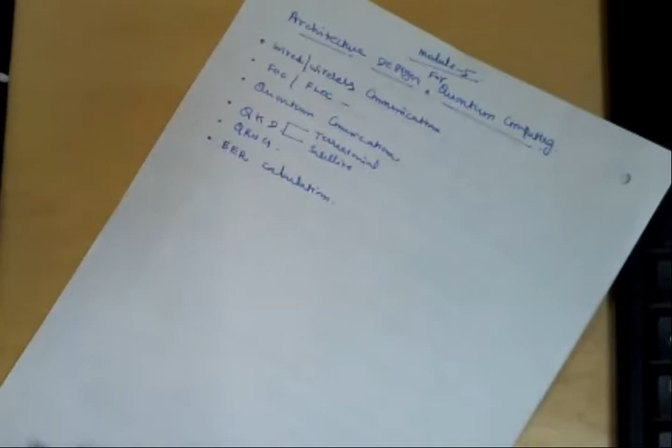This will be continued in depth in subsequent courses for quantum people. FPGA people won't have a course based on this, but all the control nowadays—polarization control, beam splitting, power amplification, basis selection, horizontal or vertical polarization, diagonal or anti-diagonal polarization selection, detection, decision making—everything is in FPGA only. For quantum computing, only the quantum is the carrier.

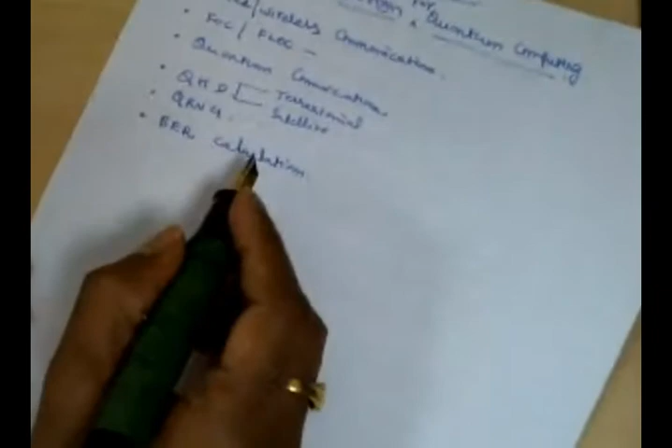These are the topics I would like to cover to give you some idea about quantum communication. Listening to me, you will get some idea how technology is revolving from simple messenger-based or words-based communication to nowadays quantum communication.

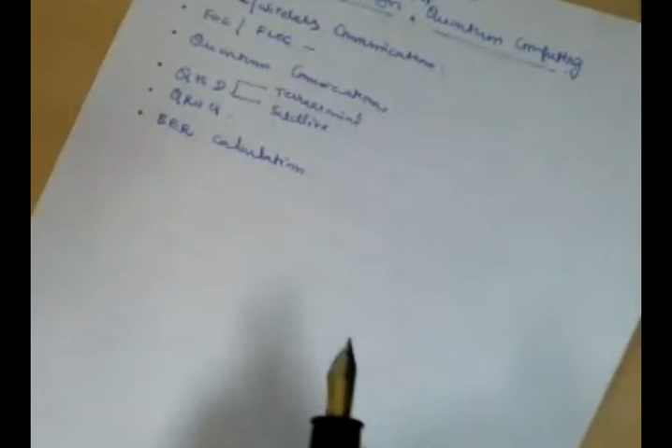There is one paper, if you are interested, you can read—that is my paper only. One second, I will tell you the topic. You can write it down and read it also.

The topic of that paper is: Historical Perspective of Free Space Optical Communications, colon, From the Early Dates to Today's Developments.

I'm sending it in our group also, if you are interested you can download and read it. This is very good, starting from bird-based communication. A few centuries back, people used birds to convey messages. They tied the message, and the bird was trained to go to that particular destination, then it came back automatically, because birds have that character—wherever they go, they come back to the same sending point. Then the messenger-based communication evolved.

So we will not go to that much of the origin of communication—we start from wired and wireless communication. If you read this paper, you will enjoy it: at different centuries, how technology was demonstrated, and how communication revolved from one technology into another. What was the need for that? Who was the inventor? Who commercialized it? Who proved the technology—proof of concept, POC? Then who made it a commercial system? All those things are given in this paper.

From bird-based communication to today, we have quantum satellites—quantum satellite, quantum deep space communication now. There is a plenty of changes, a quantum of changes in technology. Unbelievable, unimaginable changes happened in the last few centuries, particularly in electronics and communication, mechanical fields, information technology, security, defense, remote sensing, underwater surveillance, underwater communication. So I can say that except the electrical field, almost every field got changed dramatically.

So that research is still going on. We also started some work long back, but we didn't succeed because of so many limitations. We did not have that much magnetic power, that much powerful magnets, and the particular shape of magnet we needed, we didn't get in our country. So we tried to import from Japan and Germany, but they ask for a minimum order of 1,000 units, otherwise they are not ready to supply here. So a lot of things are there. If you have time, you can read about all these things. This is a very challenging field. Not much research has progressed, the reason being the availability of so many supporting systems and subsystems.

So you can see some YouTube videos where they made some perpetual rotation. There are things like a bird that moves like this, this action happens without any battery, without any power. So these are all the successes so far. We are at a very below the toy level in this electrical field, right? Okay, we will continue our things now.

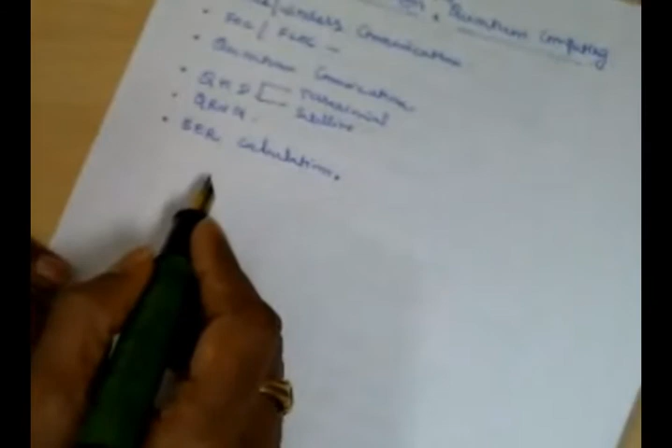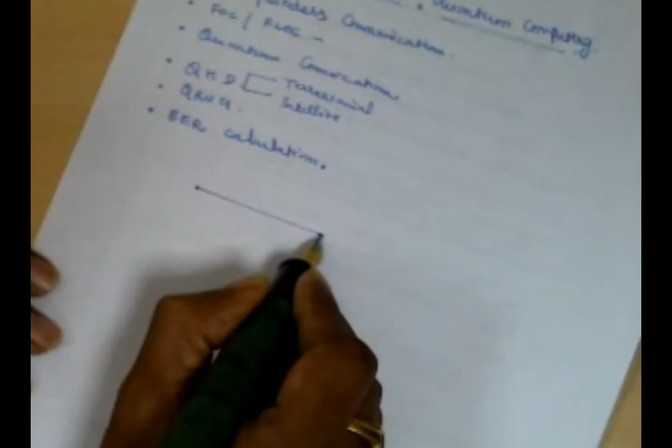Okay, now look here. In wired communication, before or after sending messages, we lay the cable from one point to another. You take this may be Pune, this may be Mumbai. That means we lay the cable from here to here. This is the physical cable, what we call telephone lines.

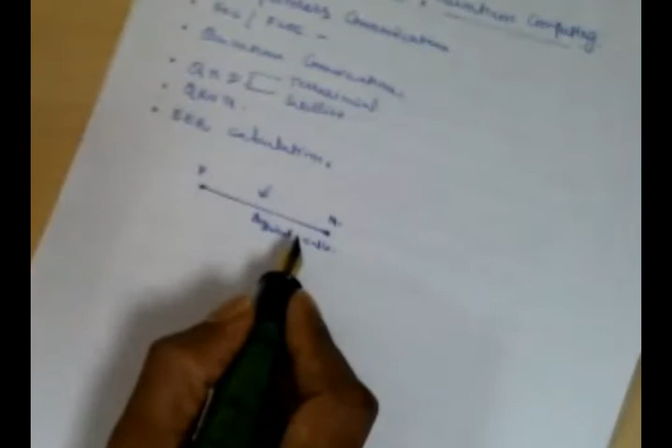You might not have seen such telephone lines at your age. You can ask your father, grandfather, or mother, they might have seen such cables. Any of you seen the telephone cable? Not the BSNL line in the street? I don't mean the cable coming to your instrument, your telephone, from the underground fiber or underground cable into your telephone. I don't mean this one. In the street, there was a post, they laid the post on the sides of the street.

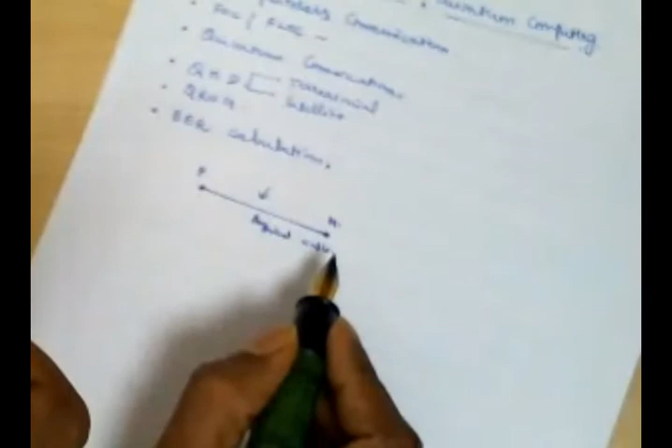From there, they ran the cable. That you have seen? 25, 30 cables like that. No sir, not that. I don't mean that. If you have a landline phone, one cable will come. I've seen that one, sir. No, you are very young then, I don't mean that cable. So this is the street, right?

So there was a telephone post here on the side. They ran so many cables - 50, 60, 70 cables. That is called telephone cables, not this one. This is your local connectivity, no?

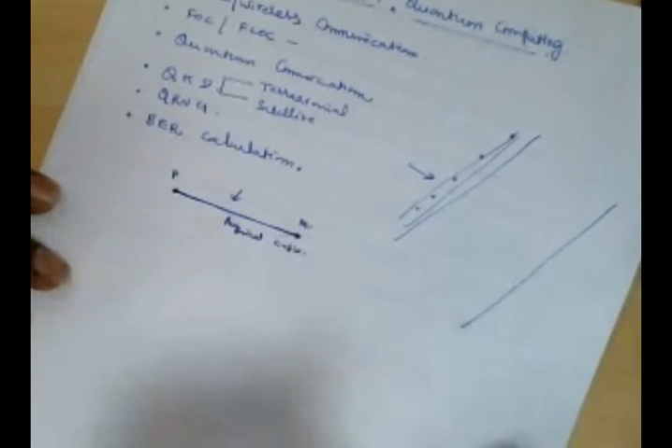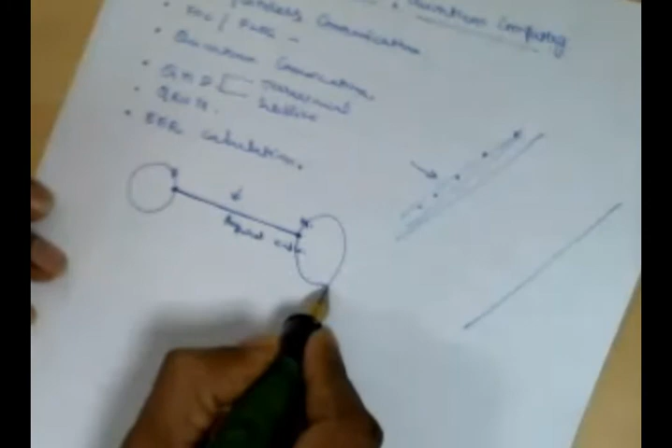Okay, Mamata? Yes sir. Ask your parents, your mother and father. They might have seen it. Now it is completely removed, no telephone cables nowadays, right? So no problem, they laid the cable from here to here outside on the post, right? So now suppose you want to communicate from here to here, there was one exchange. I know these things, I used to do these things, but don't feel that I'm that old, right?

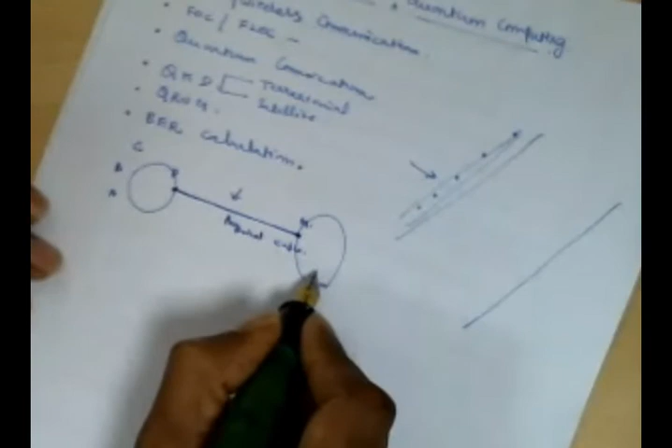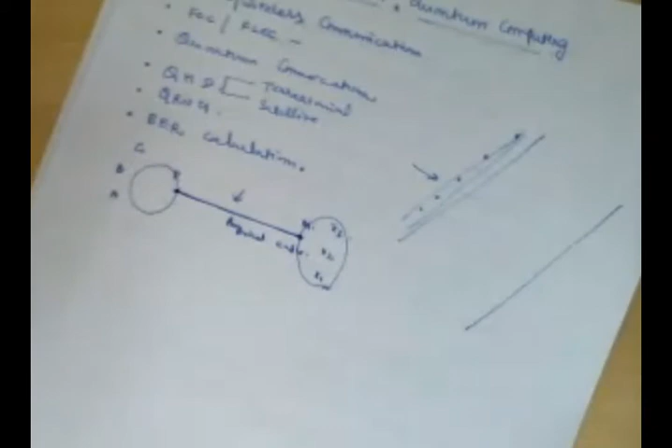So suppose A is here, B is here, C is here, right? Or maybe take X1 is here, X2 is here, X3 is here, and this was the situation. You people are very comfortable nowadays, in a hygienic, very comfortable luxury life. But this was not the life, right? But most invention happens in those days only. Nowadays we are finding applications, not inventions. Inventions are very, very low in this century and the last century also, mostly, right?

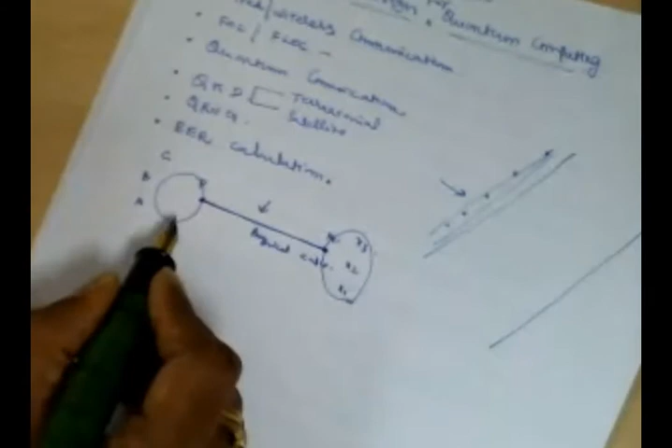Okay, so A, B, C. Suppose A wants to talk to X1, then A should give information to this operator. That is called a trunk call or book call, right? No such word nowadays. If you want to make a call anywhere, you just dial the number and get the link nowadays. But that was not the case before 20 years.

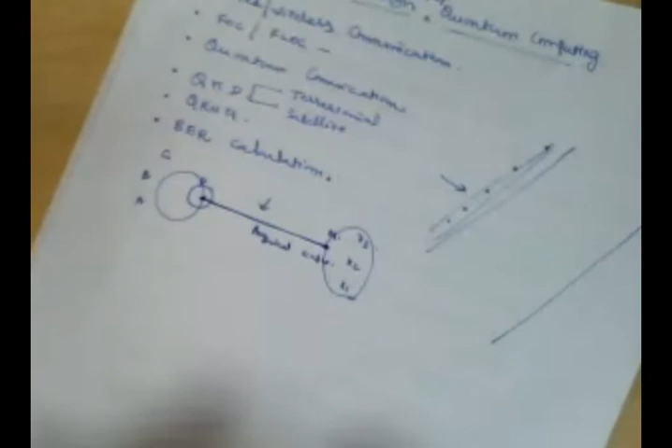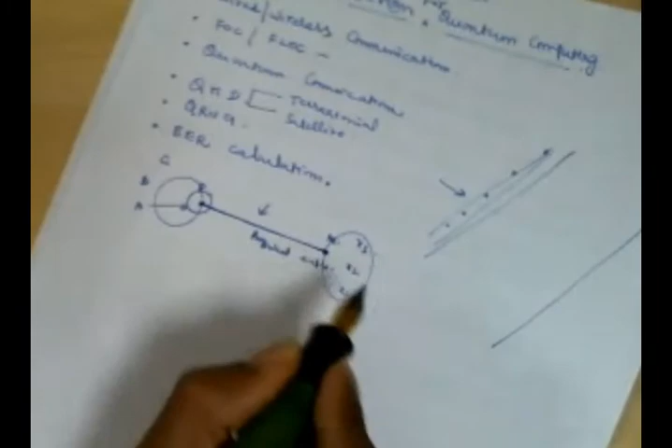So A will inform the operator, 'Baba, I want to talk to X1.' Then this fellow will say, 'Wait a little, B is already talking to X1 or X2.' Then you have to wait. When this line becomes free, that means the busy signal is over, then this fellow will remove the jack and connect it to your phone, and tell you, now you talk. Then he will connect it to X1 and connect it to A, and you can talk. Sorry, this was the case of what we call trunk calls or book calls, right?

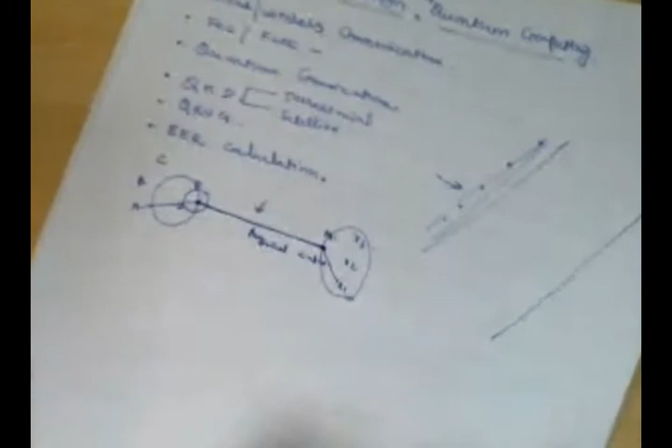Okay, first thing. Second thing, the users at that time, not telephone - if you had a telephone connection, you were the richest person in those days. Like once upon a time, if you had a cycle, you were treated as a zamindar. That means you are the richest person because you have a cycle. 'Arey, that fellow purchased a cycle, arey baap re!' So at that time he used to give a license for the cycle. Otherwise the police would not allow you to use it on the road. You could get the license for the cycle.

So at that time, if you had a telephone connection, people rushed to that house to see the telephone. Like people rushed to one house to see the TV, right? So this is that telephone connection. Then people came to know, and the number of users increased here and there.

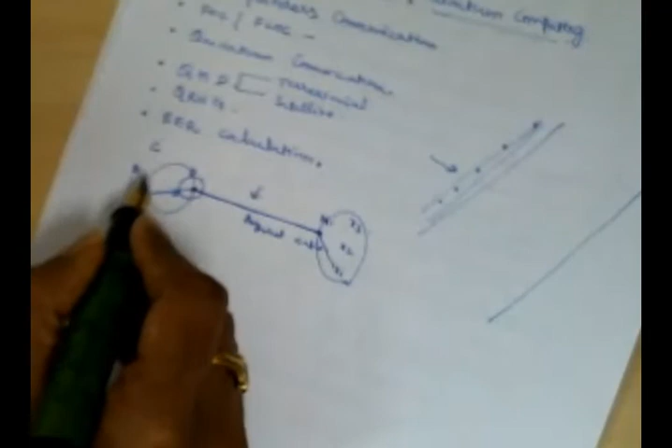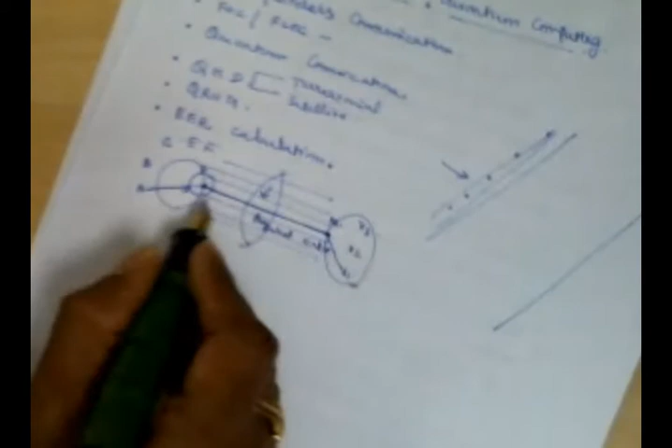So A, B, C, D, E, F, G, H, A - then they were unable to manage with one cable. Therefore they ran so many cables to increase the bandwidth, I mean capacity - to increase the channel capacity, the handling capacity, to increase the number of cables. First I have seen 2 cables, right? Then because of earth and one main cable, two should run, because this is physical connectivity, earth also should go there, right? Two, then 10, then 20, then 50. So I have seen up to 50, 75 cables also.

While going to school, we used to take one stone and throw it at that line. Then it would make a sound, a sound would come. Because so many cables are there, if you randomly throw a stone, it will hit one line, and there will be a sound.

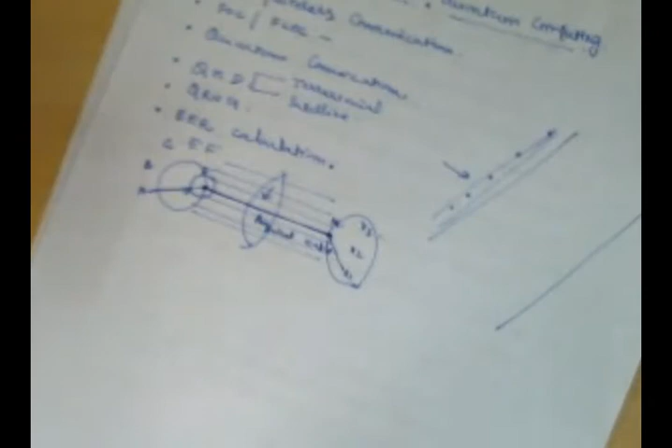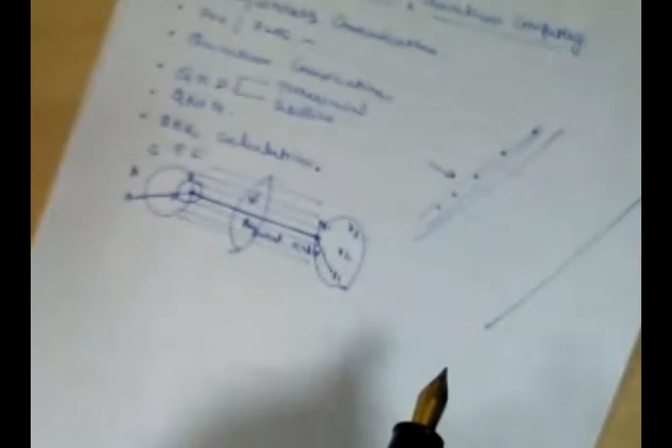That was a stiff line that we used to enjoy. At that bachpan time, we used to keep our ears at the bottom of the post to hear the voice, because people were saying voice is going there. So we did all those things, but we heard nothing. But at that age, in first standard, second standard, how would we know? We just wanted to hear what people were talking.

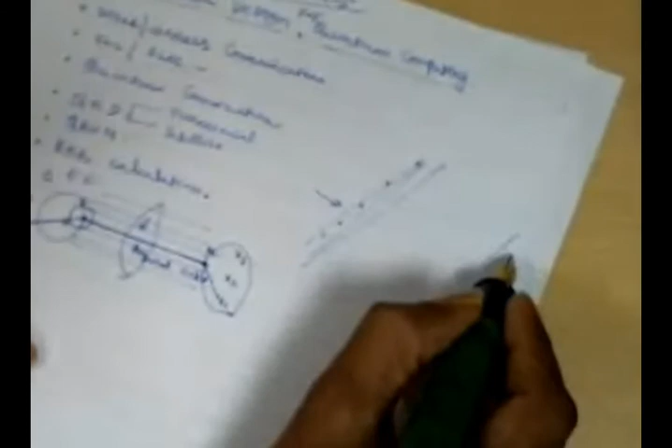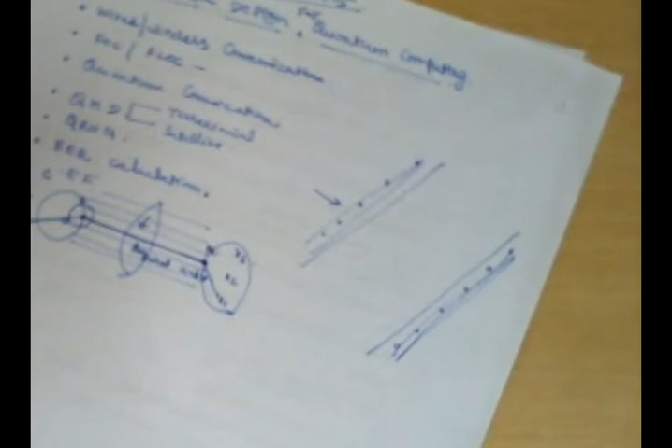Because at that time we didn't have the telephone, right? So many lines were there, and they used to lay the post on this side also, both sides of the road. Another 50 lines there too. But there were so many problems - people throwing stones and putting cloth there, keeping their flags there, and shorting them unknowingly by putting some metal rope so that it gets shorted. So when A is talking to X1, B also hears it, C also hears it.

So anyway, this is one limitation. Another limitation is maintaining the cable, running the cable. Any wind or rain, the post will fall down. So because of all these issues, and also the bandwidth, people moved into wireless communication.

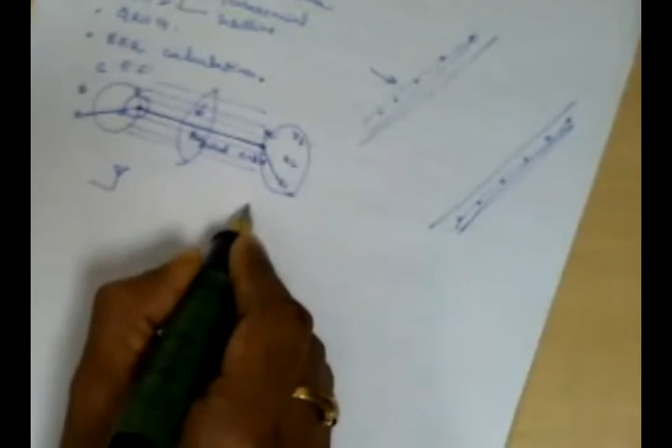Wireless communication means the physical connectivity is completely removed. People moved into wireless communication. Then so many lines were applied, and after that they implemented time division multiplexing also. Time division multiplexing means this cable will be used to connect so many links at high speed switching - what we called the commutator and decommutator. But nowadays there are no such switches.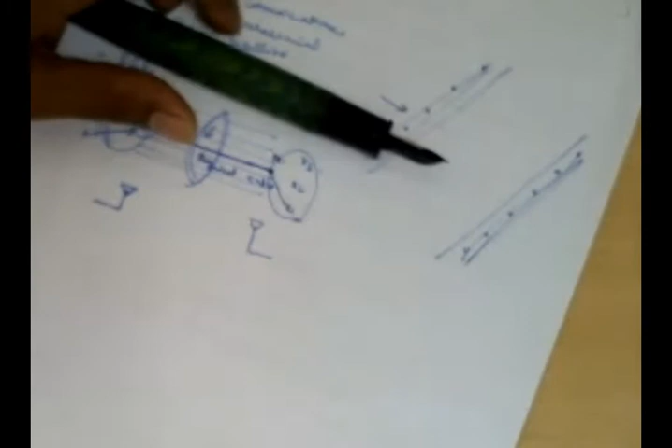Physical connectivity - there was a motor, a high speed motor that will rotate. So there are 10 channels, and it rotates at high speed, 1000 RPM per second. So all 10 will be connected to any 10 they want to connect, because it's working at high speed. So your voice will not be broken - there's no loss of information because of high speed connectivity. But that also didn't meet the requirements because of so many users.

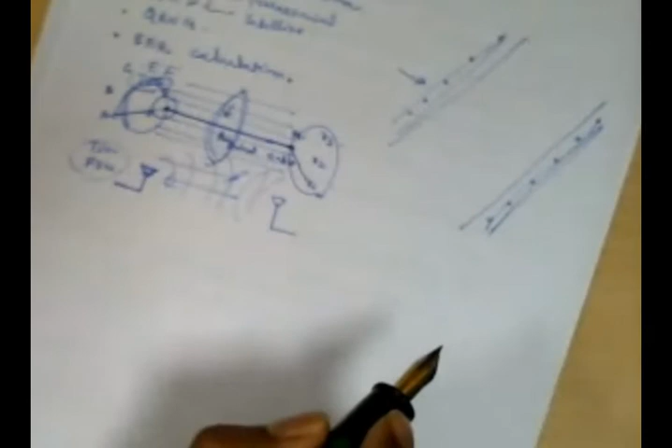Therefore, they moved into wireless communication, and applied frequency division multiplexing and time division multiplexing. This was very comfortable because it was wirelessly communicated - full duplex, half duplex, simplex, all these happened in that period. Now this is still one function.

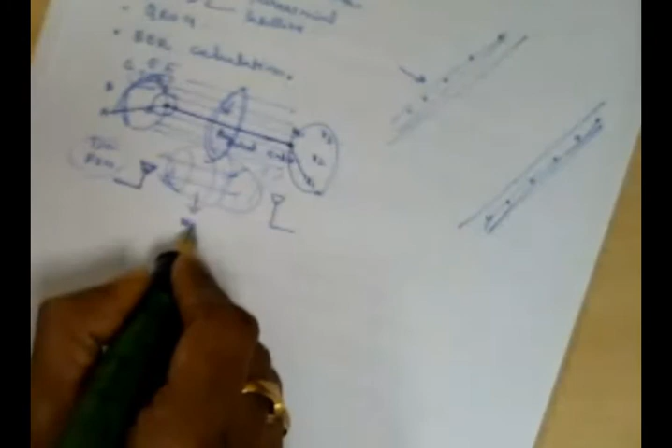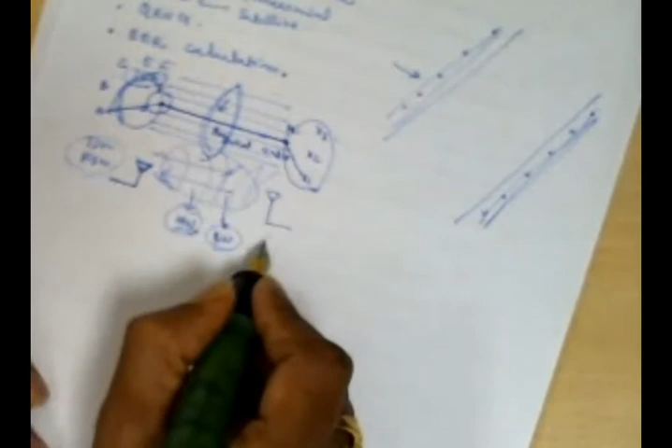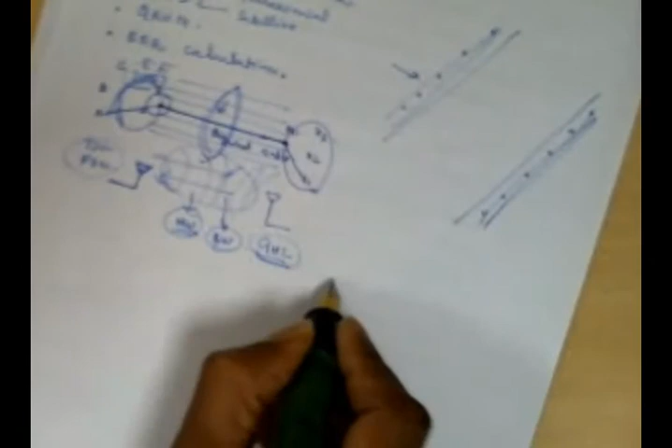Light carrier is nowadays available at terahertz, at high frequency. Terahertz wavelength is like 1550 nanometers - very, very small. We will come to this part later. So the frequency limitation is there, therefore the bandwidth limitation is there.

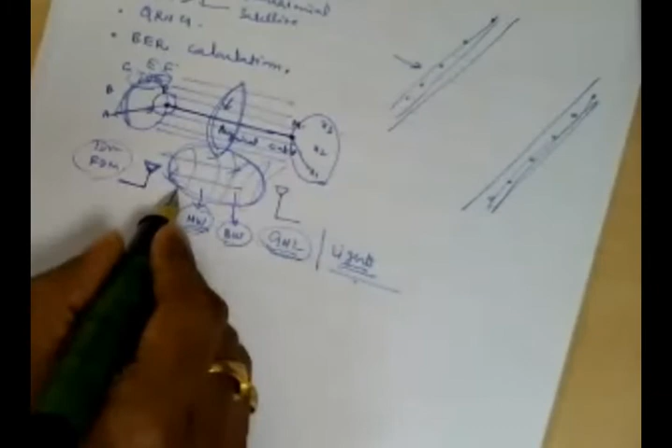Because nowadays people want to have everything in a small gadget called mobile phone, or PDA - personal digital assistant - which has become very popular. It will decide everything: if you program it, it gives your coffee time, tomorrow's lecture, your meeting, doctor appointment, and your boyfriend or girlfriend or bestie appointment.

So bestie appointment, or your children's school parents meeting, or your brother's doctor appointment - this mobile phone will take care of everything. You want all apps installed: railway ticket booking, air ticket booking, money transfer, purchase, food order, clothes order, games - everything you want to do within this one device. Therefore this instrument should have a high data rate link - a high speed, ultra speed link is required now.

So the two things are there. One is, instruments want ultra speed data link. At the same time, the number of instruments has also increased nowadays, number of users also increased in the order of millions into millions, and every instrument wants ultra speed data connectivity now. Therefore, this fellow cannot give you that much data rate, that much bandwidth, because it has frequency limitations. So, due to frequency limitations, we moved into fiber optical communication.

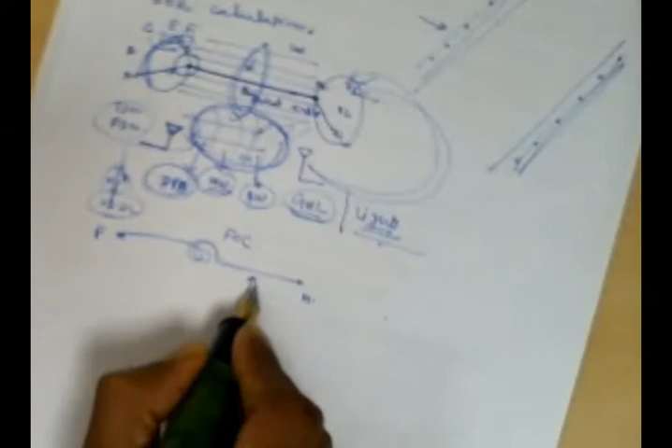So again, the issues are there running the cable, because fiber cable fabrication is costlier. There are two kinds of cable: one is the commercial cable, another one is the dark cable, dark fiber optical cable, or highly secret fiber optical cable. This is highly costlier. So quantum requires this kind of cable only to pass your key. In this dark cable, or highly costlier cable, you can maintain the polarization, whereas you cannot maintain the polarization in the commercial cable, which is used for classical communication.

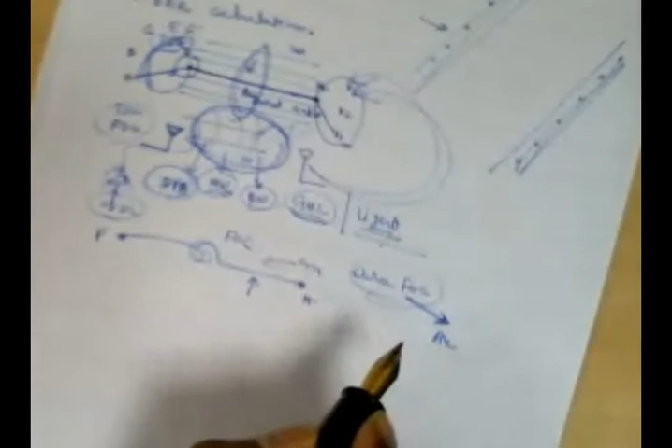So I will talk about the engineering point of view, right? Professor Raghavan sir is talking about the physics point of view. So you need to understand both. Whenever I tell you about the dark cable and all, he will give you the physics point of view, how it is made, fabricated, all those things.

So ultimate idea is we need to lay the physical connectivity now. Physical connectivity is there now. So here the fiber is there, because here the carrier is microwave or millimeter wave, but here the carrier is light. Now you need to understand, we are not going for fiber optical communication because of fiber. We are going for fiber optical communication because of light. Light is the hero here, because light is high frequency, terahertz, a high frequency signal. Therefore, you can pump more amount of data through the channel now.

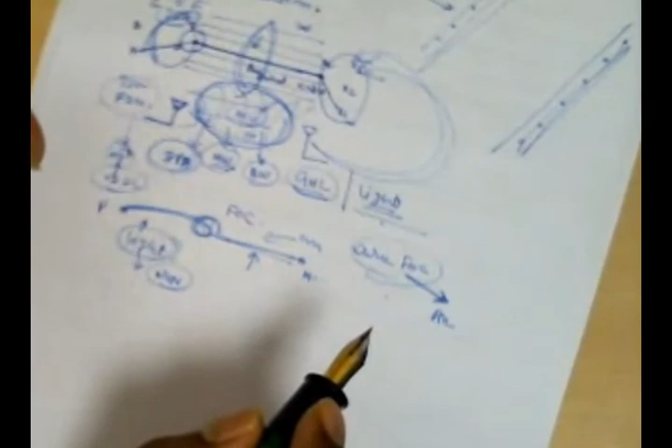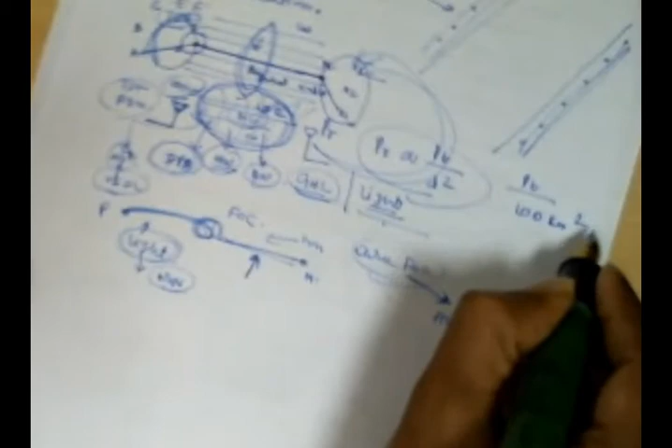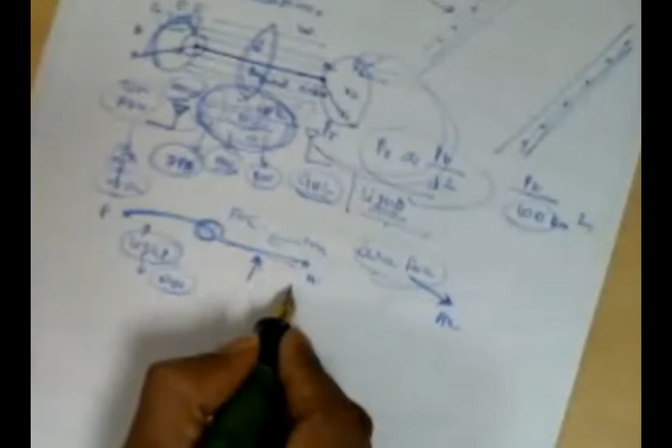But the research was, the fiber was made first of all to pass the light from one end to another end, so that there is less attenuation, because this is a very ideal medium. Whereas if you pump 100 watts here, and if you want to measure the power received at this point, PR is directly proportional to PT divided by d squared. That means if this is 10 kilometers, then your transmitted power will be divided by 100 kilometers squared. So ten times the range, 100 times the transmitter power will be reduced because of the free space loss. Whereas in the fiber, there is no such amount of loss, only 0.2 dB per kilometer.

This is very negligible loss in the glass medium. Very comfortable medium, very ideal medium. So you can pump your light here, right?

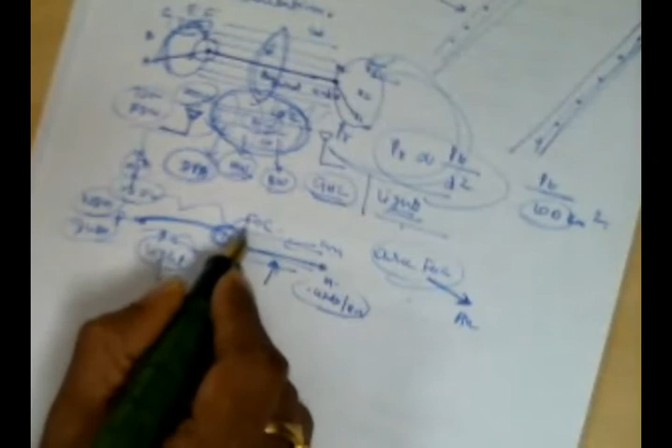Then people introduced WDM, wavelength division multiplexing, dense wavelength division multiplexing, to increase the channel capacity over a single fiber. Then they laid 2 more fibers, 3 more fibers to increase the channel capacity. Already the light is a high capacity channel. When we increase the number of channels, you can further multiply the channel capacity. Therefore, you can meet the requirements.

Nowadays, almost all the points are connected through fiber optical cable. From exchange into your local distribution station or data center, we have fiber optical connections. You might have seen it on the road also, where they ran the fiber optical cable or buried it in the ground. All BSNL, Reliance, every service provider is keeping the fiber optical cable for high speed communication, high data rate communication and high channel capacity communication.

Now the question is, why do we need fiber? Why do we need fiber? What happens if the fiber is not there? Because the fiber is not helping us for high data rate or high channel capacity.

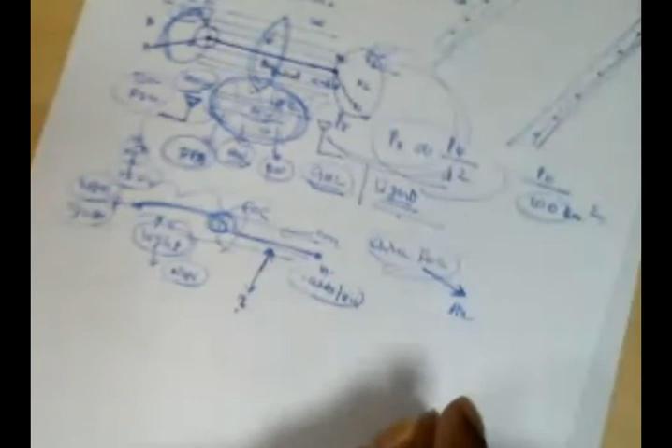Only light is supporting us. Light is the agent here. Light is the hero here. Because of light only we are able to modulate the data at high data rate. You can accommodate more and more channels. So channel bandwidth is high, channel capacity is high. Everything is increased because of light, not because of the fiber. So the question is, this is called fiber optical communication.

Question is, I will take the laser source here and directly pump into this point. Assume I am maintaining line of sight between two points, say 10 kilometers apart. So I'm pumping the light from here to here. This is the modulated light.

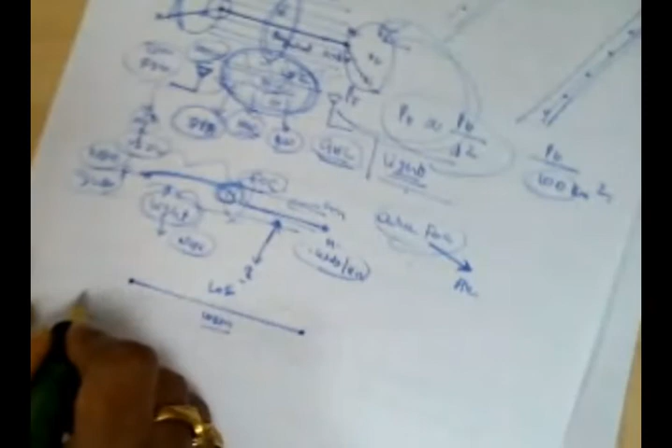I'm using the laser source here, transmitting in the air, in free space. So the light will be collected here, then you demodulate it. You do all your receiver chain operation, then transmitter chain operation here, receiver chain operation here. What will happen?

I replaced the fiber now. So this is what we call free space optical communication, FSO, fiberless optical communication, or wireless optical communication. So now the technology is going back again into wireless optical communication. See that communication revolution: birds, messenger, person, wire, single wire, multiple wires, wireless using antenna, TDM, FDM, then wired fiber optical cable, then fiberless optical communication now.

NASA claims that they have ground to satellite communication through laser beam, satellite to satellite through laser beam, then satellite to ground laser beam now.

Here the advantage is no need of laying any fiber cable. You don't need to spend money for the fiber, because in fiber optical communication, most of the amount the service providers spend is for purchasing the fiber, laying the fiber, maintaining the fiber, amplifying the optical signal in between. So all those things are removed now.

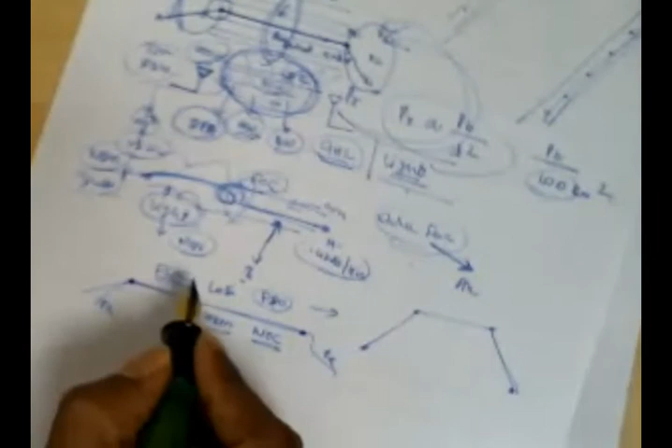Just you keep the laser source and focus it. You might have seen that keychain laser, some of you might have used it also. A small laser, something like that. If you switch it on, the beam will go there. So the power is only 0.6 milliwatt, but that can go for 2 kilometers. So that is what we call free space optical communication.

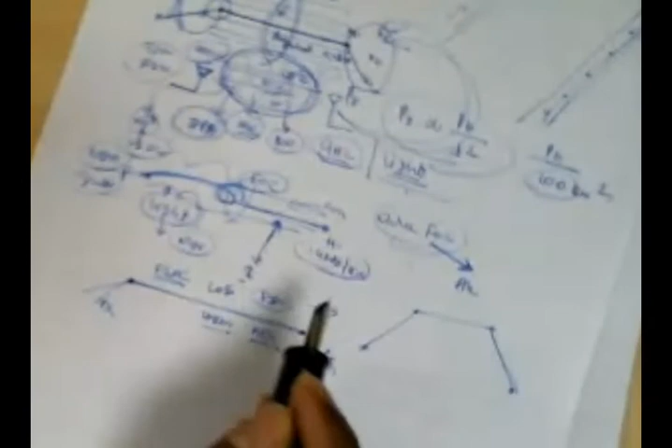So people are working in this field now. They want to remove the fiber optical cable using this kind of communication, free space optical communication, wireless optical communication. From here, the technology had taken a big jump, right?

Because behind this, Einstein was already talking about the quantum, right? People did not realize the quantum till now. They were telling that it is imaginary only, that it cannot be realistically implemented, that it is difficult, all those things. Whatever Einstein told in those days, there is one book, another book, 'Mr. Einstein, You Are Wrong.' You can read that book also if you like, you can download it, or there may be one for 200 rupees only. I have that book, I can give it to anybody who needs it.

Mr. Einstein, you are wrong - that book mostly talks about his arguments and statements about quantum theory. People opposed him in those days, right? Many people opposed, even top level scientists also opposed.

Mr. Einstein, you are wrong, they said - there is no quantum at all. Quantum principle is not realistic, that is imaginary. But now people are realistic. They are realizing nowadays, implementing it at a smaller level.

So we also started a big program here, spending around 250 crores at the country level, to go for QRNG, quantum key distribution, satellite quantum communication, and free space quantum key distributions. I have taken some papers - if you're interested, you can read them, I will put it in the group.

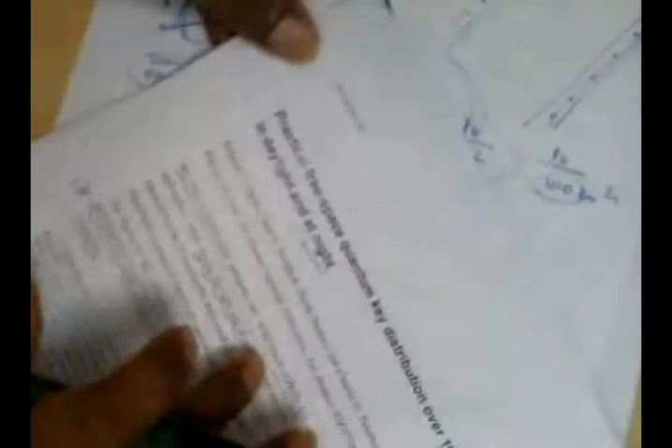One USA group claims practical free space quantum key distribution over 10 kilometers in daylight and at night. This group is also involved in quantum satellite communication now. So these people successfully distributed the quantum signal for 10 kilometers.

Then there's an FPGA based 4 megabits per second secret key distribution engine for the quantum key distribution system. Wherever you talk about QKD or QRNG, there is FPGA involved, because the FPGA is what selects your polarization. How does QKD work?

One more paper - this is very interesting - practical free space quantum key distribution over 1 kilometer. FPGA is there inside, you can see that one also.

So you cannot separate the FPGA engineer from the quantum engineer, because both are significantly linked nowadays. So you need to write all the major algorithms from here, where the technology has taken off. I have only 20 minutes, so I'll go a bit faster now.

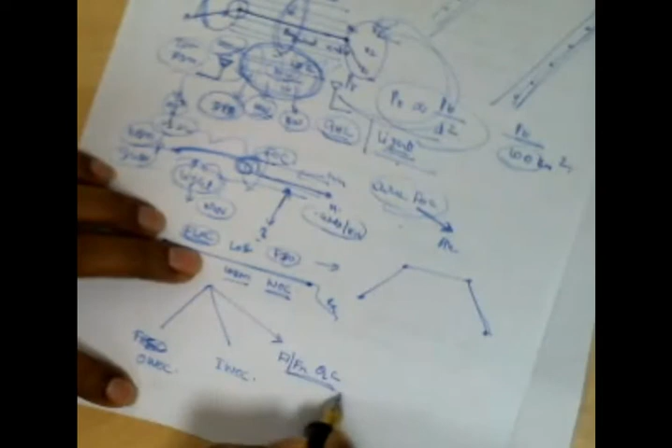Outdoor optical wireless communication means your beam travels through the atmosphere so you can communicate. Indoor optical communication means that almost in every room, every conference hall, every institute, every company, you use light in daytime. So now I am also using the light - research says why shouldn't we use this light for providing everything to the user.

That's what we call visible light communication. That means you just need to switch on one light, then the light falls on all the places in your room. That light will give you internet connectivity, mobile phone connectivity, your entertainment channels, TV channels - through light you can access any kind of application. That's what we call Internet of Everything, IoE - Internet of Things is gone now, it's Internet of Everything.

That means with visible light, you just need to keep your gadget below the light. There are 3 lights, that light definitely falls on your instrument, no limitations, so you can access everything now. You don't need to run any cable from one point to another - that's what we call indoor wireless optical communication. So a light is there, therefore you can meet the high bandwidth requirement.

Then you go outside for quantum communication. But in these 2 technologies, you need to pump millions of photons - suppose I have a laser source here, this is the laser source, and I have a 3 millimeter beam. So I'm pumping now.

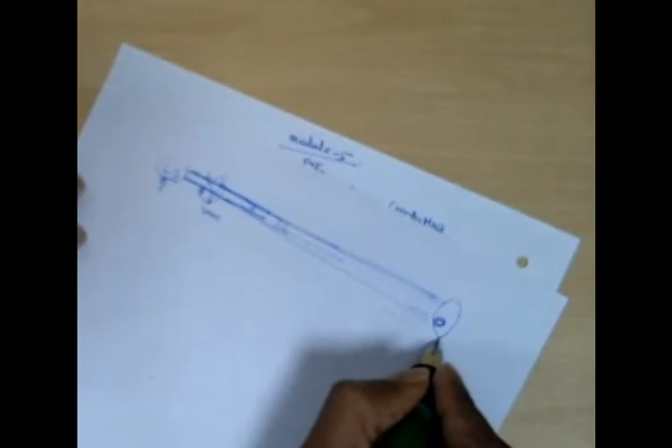So whenever I communicate here, if it is traveling in the free space, there will be a sort of divergence that you can control by the proper optics. You keep the detector here, a receiving telescope, collecting some number of photons, or all the photons, and then converting into electrical signal. That is happening in the free space optical communication.

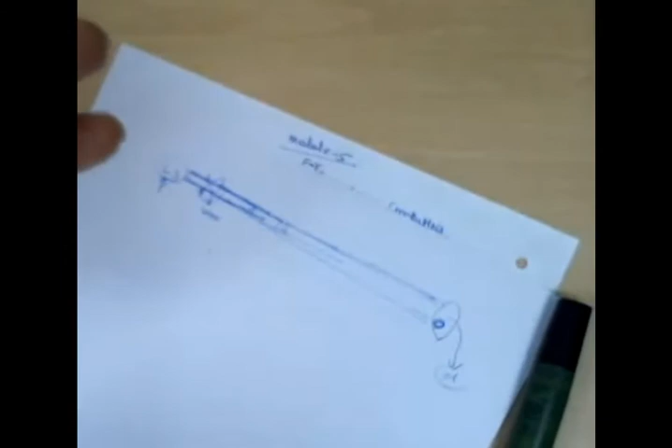Or even in the fiber optical communication or indoor wireless optical communication, we talk about the light only. Light means millions of photons together. So in that case, suppose I'm sending million into million photons here, and I'm capturing some number of photons.

There may be attenuation in between, so some photons will die due to scattering. If the size of the medium particles is comparable to the wavelength of the light, then that will automatically scatter it or reduce its power. So the reduced, attenuated signal is available here. We are getting the photon and then we are doing it, right?

But now the research, this is what Einstein told, says that why we should send a million into million photons unnecessarily? What happens if I send only one photon, only a single photon? That's what we call the quantum. So instead of sending so many, I'm sending only one photon, and this one guy is traveling here and reaching this point.

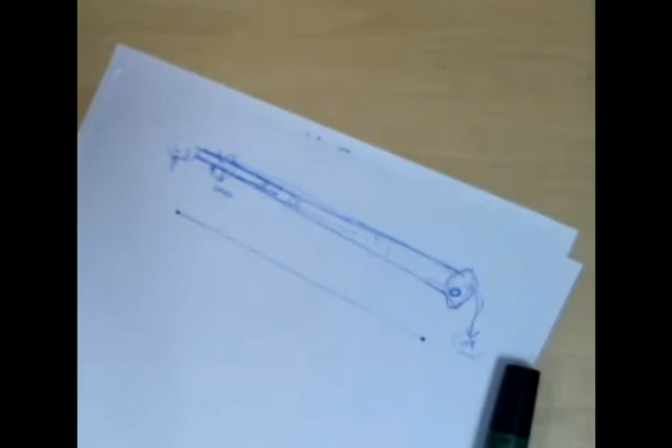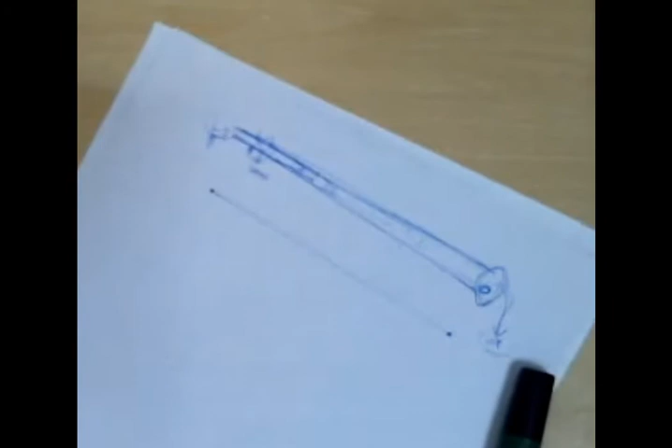So whether million into million photons are traveling or only one photon is traveling, that is immaterial, because all the photons are traveling at the velocity of light, roughly 3 into 10 power 8 meter per second. The actual speed is 2.99792458 into 10 power 8 meter per second, but for roughly talking, 3 into 10 power 8 meter per second is the velocity of every quantum, every photon. So that photon will travel here with no change in the speed. Same speed it is going.

So why should we not use every photon to carry one bit? Imagine million into million photons are traveling here. So when I talk about one photon for one bit, then my channel capacity will be exponentially increased. There is a quantum jump. So all the technology, there is a transition, a quantum transition.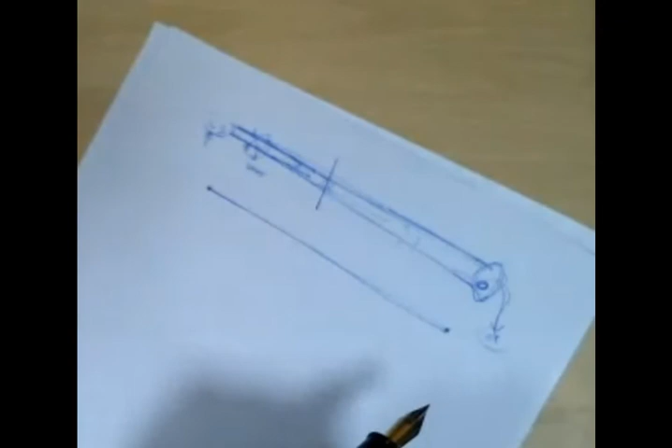So by sending only one quantum, attacking this quantum is highly difficult. The eavesdroppers cannot just do it, because I will not just send the quantum like that. We are going to change the polarization of the quantum, either horizontal, vertical, or diagonal, anti-diagonal, and map it accordingly. So the idea now is only one photon, we are going to deal with it at the photon level.

So that is what he said, you can do it. Then you take one photon, right? That is called single photon generation, or else you can attenuate the light to the level from where you are releasing only one photon.

So optical attenuators are there, or optical beam splitters are there. You can rotate them and then you can generate, limit the number of photons, meaning the amount of power. So you can down convert it, reduce the photon at different levels, and finally release only one photon. So suppose I am taking one red color light here, 650 nanometer.

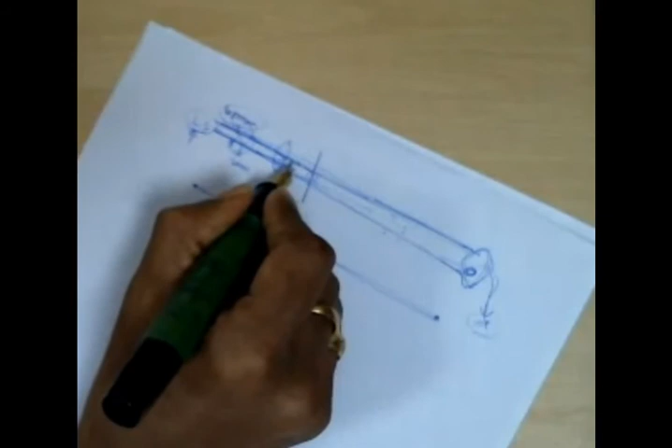Then I am sending into the attenuator. At this point, when I ensure that only a single photon is coming, I can't see the color. Because to see the color, to eliminate the atmosphere and space effects, you need multiple photons, right?

You can see the red color light here, but after this attenuator, you can't see anything, though it is 650 nanometer wavelength. 650 nanometer is visible, red color light. You should be able to see the light.

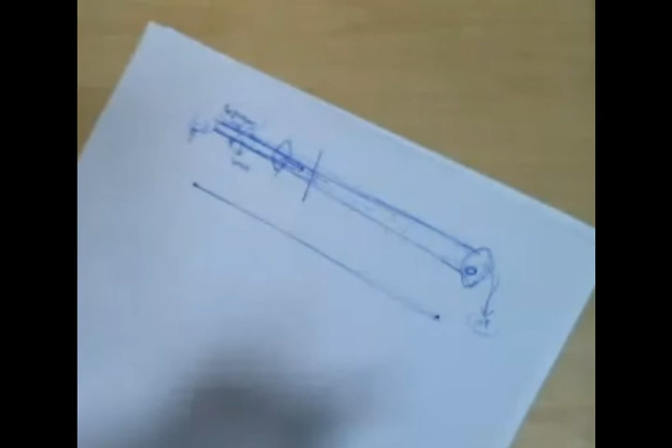But when you reduce the number of photons, you can't see it, because one photon will comfortably mingle in the atmosphere and travel. Our eye cannot see a photon's color, even though it is a 650 nanometer wavelength.

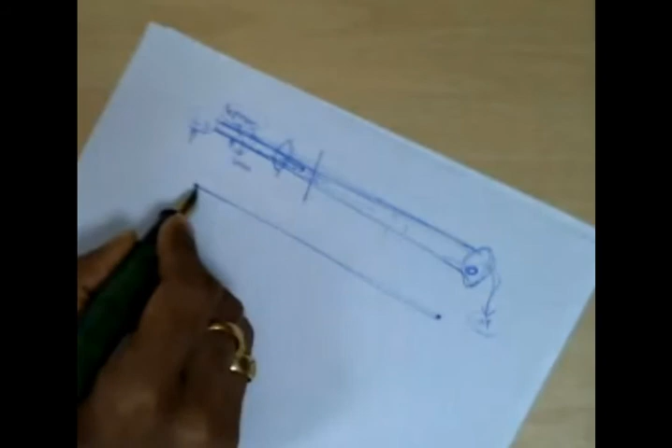Understand now? So the important thing is, whenever I am sending one photon, if due to the atmosphere or something that photon dies, then I cannot get anything here. Therefore, the problem still is, what is the bit rate you can achieve successfully? What is the confidence level? What is the realistic bit rate?

But when a million into million photons are traveling, even if 500,000 photons die in between, nothing happens, because the remaining half is there and I can amplify them. Even if I get a quarter of the photons, I can recover the original information.

But whenever we are sending a single photon, we should ensure double care is required, right? But you can't do anything about the atmosphere.

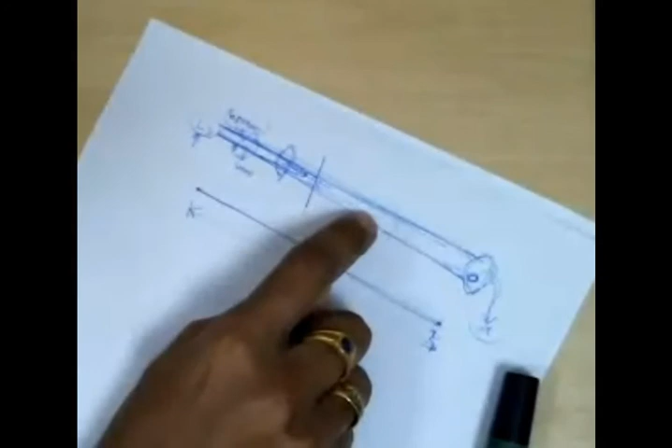So you need to select the optimum wavelength and optimum polarization in order to mitigate the atmospheric effect. But in this communication, it will invite a lot of signal processing and optoelectronic complications.

Because you deal with millions of photons simultaneously, there is a tip-tilt error, there is a wavefront error, but in single photon transmission, nothing like that happens. You need not go for any fast steering mirror or deformable mirror. Nothing is required, because a single photon will travel with its own polarization.

So in free space, you can maintain the polarization. In dark fiber, you can maintain the polarization. Understand now? So we are going to talk about quantum.

Understanding quantum is not at all possible unless you see what basis I have selected from this end. You can check so many possibilities, but by randomly choosing the basis, you cannot match it.

The eavesdroppers cannot attack it easily. Even if the eavesdroppers are attacking us, I will come to know something is going wrong, so I can discard all the bits and go for a new kind of transmission.

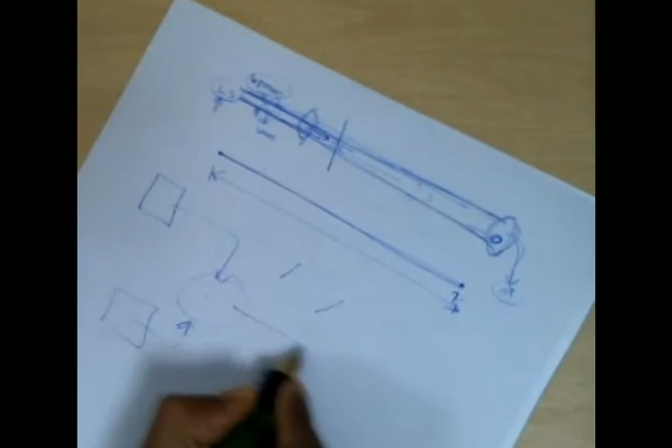Understand now? So the architecture says you need to select the single photon from here, then generate the QRNG, quantum random number generator. Then this goes to basis selection, with one basis here, another basis here, another basis here. You select any basis randomly, then you transmit the quantum photon.

Then you get it back and do the reverse operation. You lock the data here, then mutually communicate through your common channel. This is the highly secret way of distributing the keys.

I tell you, this is highly unbreakable, even by the quantum computer. The reason is, so far whatever encryption we have performed mostly uses mathematical algorithms, RSA algorithm, DSA algorithm, so many mathematical algorithms we have used for encryption, which can be broken simply by the quantum computer or parallel distributed computers.

One claim, reported in a paper, said that 40,000 years, actually 40 quadrillion years, are required to break one RSA 129 cipher using that algorithm. But that cipher was broken within 6 months by a distributed network of computers.

So dear students, the attacker is equally skilled, and they also go for different techniques to break the algorithm. So whatever mathematical algorithm you are using can be broken easily.

But in quantum key distribution, quantum encryption and decryption does not use mathematics, it uses physics. We are going to change the physical property of the system. We are not going to encrypt by any mathematical algorithm or formula. We are going to change the property of nature, the property of light, the property of quantum.

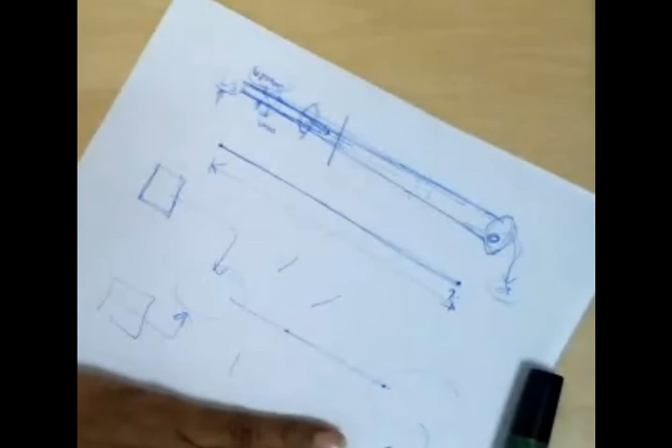You can see some of our papers and you can read it also. But whenever you people come here, you can see all those demonstrations. So these are all the terrestrial links now. To cover the long range, we should go for the satellite.

I'm sending the photon here, I'm passing the photon here. So the classical channel is maybe through some other medium. Then this is only for the key distribution. So that's what we call this, both are same. That means you can use this one for communication, that is quantum communication. You can use this one for key distribution, that is called quantum key distribution.

You can generate the random number, you can pass through the quantum. That's what we call quantum random number generation, QRNG. And then this is one thing. One is your quantum key distribution, quantum communication, quantum random number generation, and whatever computation we need to do here is called quantum computation. So quantum computing, quantum communication, quantum satellite key distribution, quantum QRNG generation, free space optical communication, free space quantum key distribution.

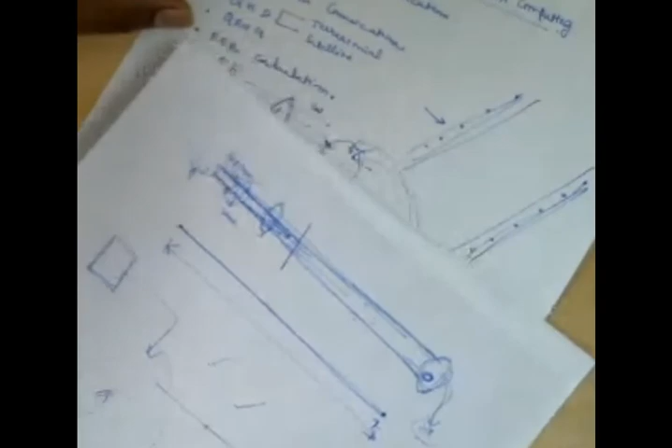So the BER calculation, I will skip it now. Maybe we will continue in the future. That will take another 15 minutes. So leave it now. So this is what I want to tell you now.

Why this field is required? Why is this field nowadays coming up? Because the reason for choosing quantum nowadays is we have sophisticated optoelectronic systems, high-speed computation capabilities now. When Einstein was telling that one day the quantum computer will come, people did not believe in those days. Now it has come. Now the system is working, a realistic system is there now.

In the same way, when we talk about Hertz speed computers, people didn't believe quantum computing will come, quantum communication will come. But now we have the tera speed processor, tera speed computation now. So now everything is possible. Therefore, now only the situation is this is the right situation, right technology growth. The technology reached the maturity where you can talk about the ultra speed.

I mean, terahertz speed computation and communications. Therefore, people nowadays talk about quantum computing, quantum communication, quantum key distribution, quantum PRNG, quantum satellite, quantum terrestrial link, because these things can be realized nowadays since technology is supporting it. So this is what I want to tell you, and I want to show you something in one picture. With that picture, I will close because you should go to sir's lecture.

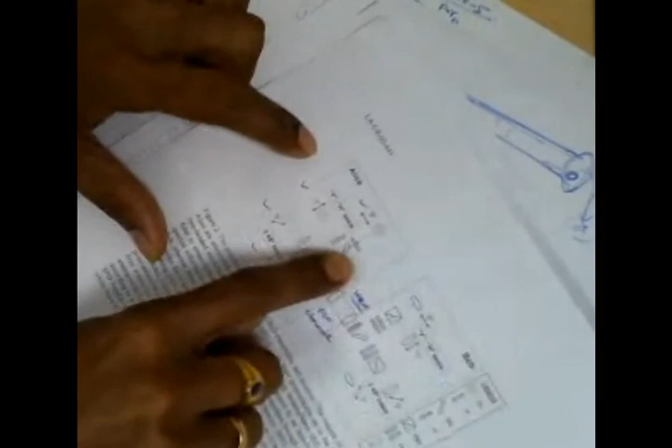So both are going into the beam combiner, and this is going into the beam combiner. So another beam combiner, again attenuator now. Then this is for local measurement, right? Measurement at Alice's side to come to know what basis was chosen at that instant of time. So the selection operation of all these things is from the FPGA now, right?

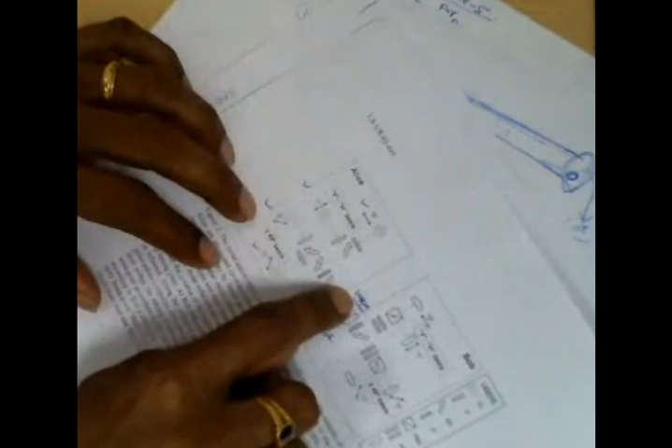Then this is the transmission optics. It sends the quantum outside into free space. It travels the 10 kilometers because the light travels in the line of sight, right? Then it couples with the receiving telescope now. Again I do the reverse operation now.

So I'm checking all the possibilities now. If this is matching, fine; if anything is not matching, then that may be the atmosphere or the eavesdroppers. The atmosphere will not give you that much deviation, that much error. If that much error is there, then there are eavesdroppers, right? You can discard all those things and go for new ones. But if eavesdroppers keep doing it again and again, then you should change your location or change your protocols now. So that is already in place, right?

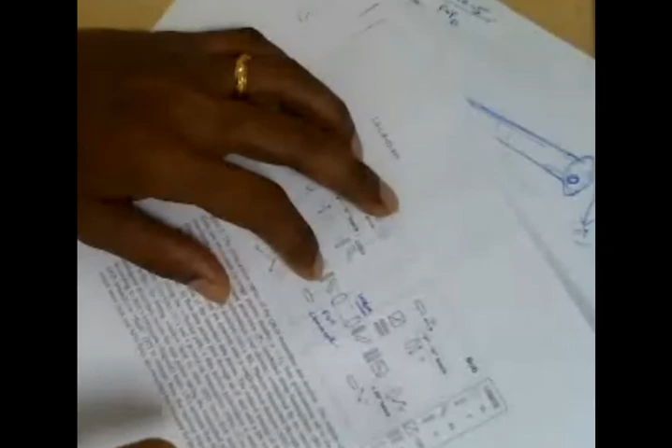So that means if they are attacking you, it is equal to breaking the existing link — the breaking or cutting of the fiber cable is equal to a continuous attack now. But in this case, there's no physical medium; I can just change the telescope somewhere, and from there I can distribute the key. You got the idea, no?

So to attack this kind of free space key distribution, you should know the path first of all. It is invisible to you, but with a fiber, people will easily come to know where it is running, because you have to bury it and lay the cable, and in between you have boost-up stations, amplification stations, so people can easily attack it.

But here you cannot attack because they will not come to know where your channel is. And you can easily tilt the channel. This is the telescope, just curve it like that, and then you can communicate — instead of to Mumbai, you can communicate to Thane. Nothing happens, because it is just a matter of this.

But provided you should have the optical fiber cable — I'm sorry, line of sight. So having the line of sight is the problem. Therefore, we go for the satellite, right? You pump your quantum signal to the satellite, then get it back, then steer it accordingly so that instead of Mumbai, it goes somewhere else. So sensing the path is hard, because it is a pencil path.

So only one photon is going here and there at the speed of light now. So coming to know that path and attacking it is highly difficult. And even if you come to know it, and you pump one more photon from there, I already play the role somewhere with the polarization, right, the basis selection.

So what is the basis I have selected? Only I will come to know, right? Later we will talk over the classical channel, but the enemy cannot understand because all are photons, single photons. Understand now? So with this I will stop.